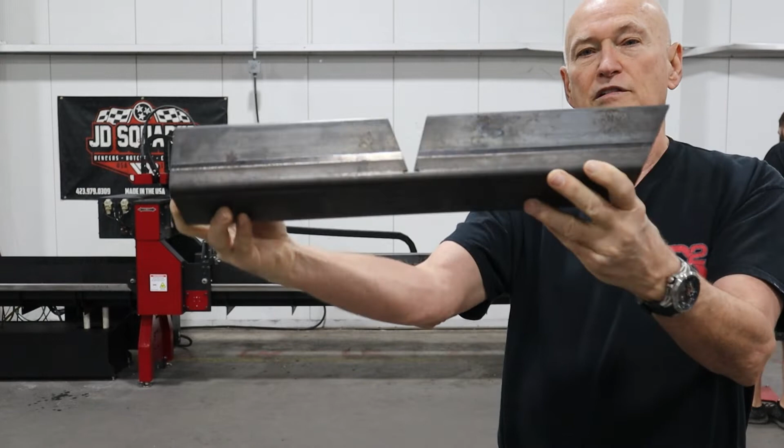Thanks for tuning in. As you can tell, I'm on a live factory floor. In fact, they're actually making these parts behind me. We use our wedge cut system, let me move over so you can see it good, to make the legs that go onto the XR6, XR12, stuff like that.

But anyway, I want to take this opportunity to answer a couple questions that a previous customer who got their XR6 a few weeks ago had asked. There were two things they wanted to know. The lady that's generating the CAD files for the program just wanted to know, is there an easy way to put a piece of tube in the machine and cut it off at an angle or square or whatever.

So currently there's not the easiest way to do it. We're going to be adding that very shortly, but I will be going back showing you in Camelot how to quickly do that. It's easy, but it's not as easy as it's going to be. We're going to be adding wizards to the XR machines where you basically pop a wizard up and say, I want to cut this square or rectangular tubing, and you tell it the angle. The reason we haven't done it yet is calculating that angle coming across this curve is a little math intensive. So I've got to do that.

Now we've already added the wizard that will actually cut off a round pipe. You just put any pipe in it, tell it the diameter of the pipe, and the machine will auto cut it off so that you don't have to go to Camelot and generate a program. We did that one because I'm coming out with the tilt head attachment for the XRs, the manual tilt head, probably before FabTech. What's the day? Like October 7th or something like that, 2022 by the way. So we'll be bringing that out.

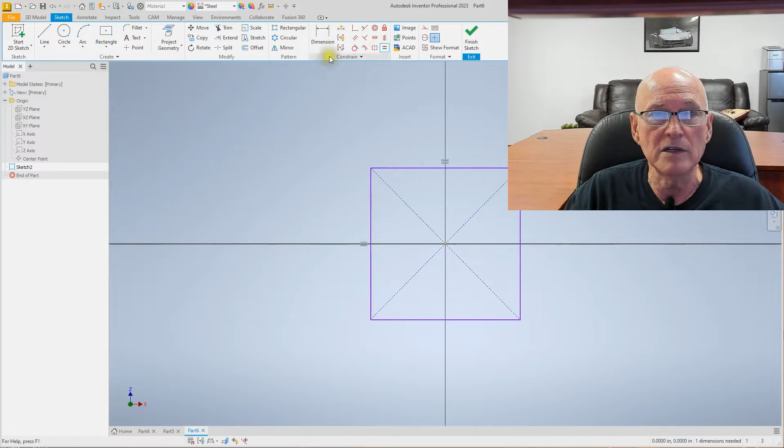All right, let's go ahead. I'm not going to teach you how to run a CAD program. I'm just going to show you how to create that square tube. All right, so we're going to create a square. Let's make the sides even. We're going to go ahead and dimension it at 4 inches because we are doing a 4x4. Now I need to go ahead and fillet the sides. They're 1/4 inch, so let's change that to 1/4 inch. 1, 2, 3, and 4.

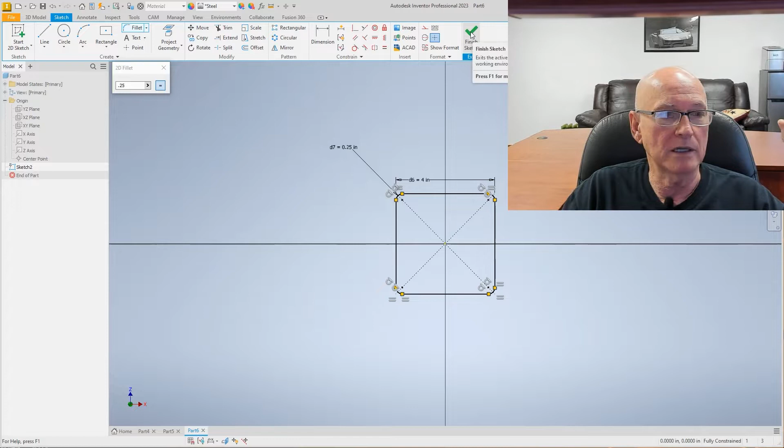That's the outside of our tube right there, and I already screwed up because I just noticed I didn't minimize myself. Well, I'm starting over. So let's go ahead and shrink this ugly dude down. All right, let's continue. Sorry about that.

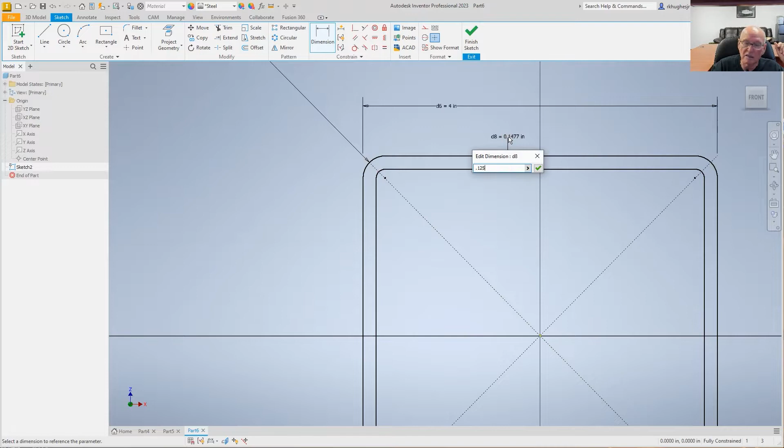All right, now what I've got to do is offset this path right here in a little bit. And we know that we have a wall thickness of 1/8 of an inch. So that is our profile right there. Now we could extrude this profile out and accomplish what we want to do. But before I do that, let me show you the proper way to sweep a profile. Let's say, for instance, it has bends in it.

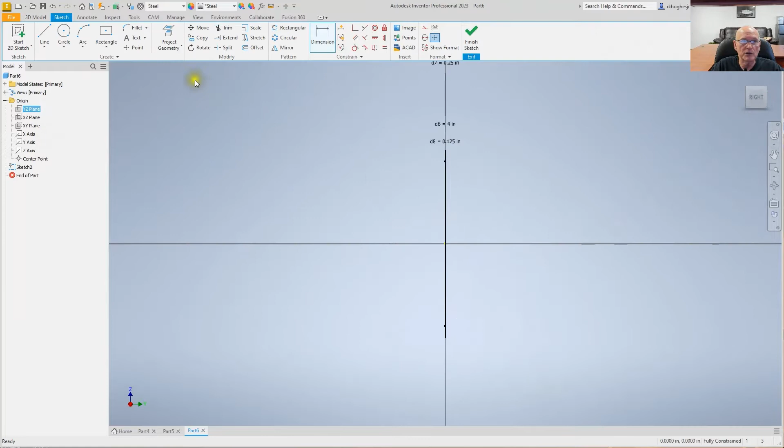So what I'm going to do is I'm going to go ahead and we're going to create a new sketch. Let's draw this line here to here. We're going to go up. We're going to put a bend in it for giggles. And then we're going to go up. Okay, we'll say okay. I'm going to say that these two ends are equal. And anything I'm doing right here, there's no rhyme or reason. I'm just making a part.

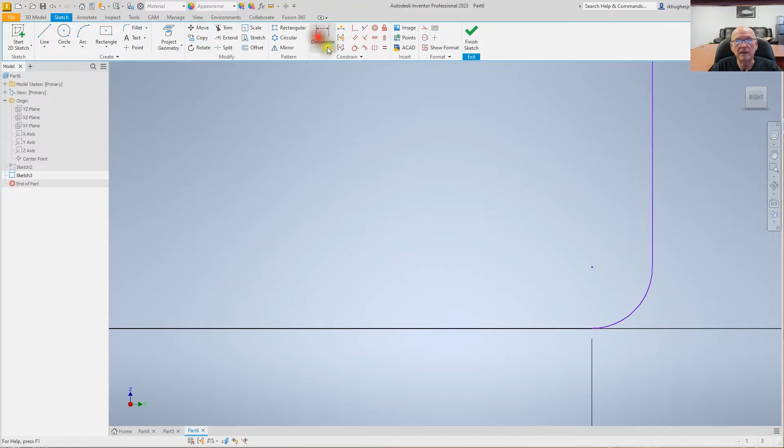Let's go pull this out and let's dimension this. We'll say 6 inches. We just need a number. Okay, there you go. There's how you would create the profile and the sweep. So if I go up here to sweep, it's asking me for the profile. I'm going to click that. Now it wants to know the path. I'll click that one. Okay, that's your part.

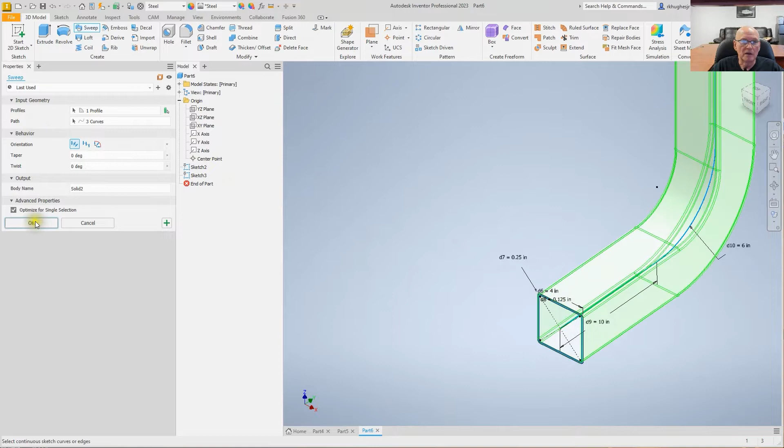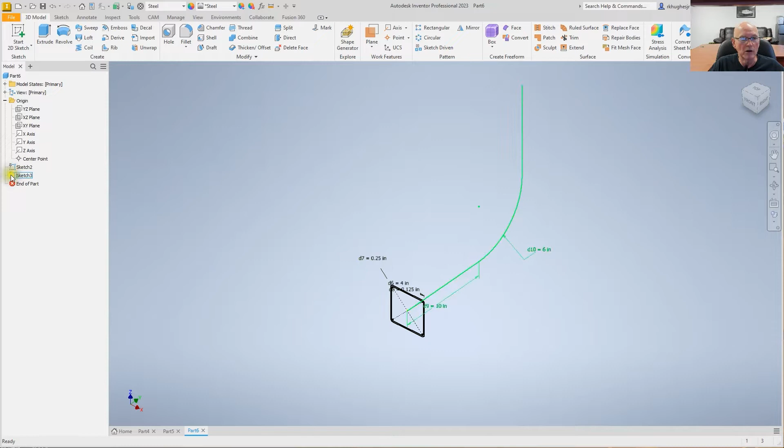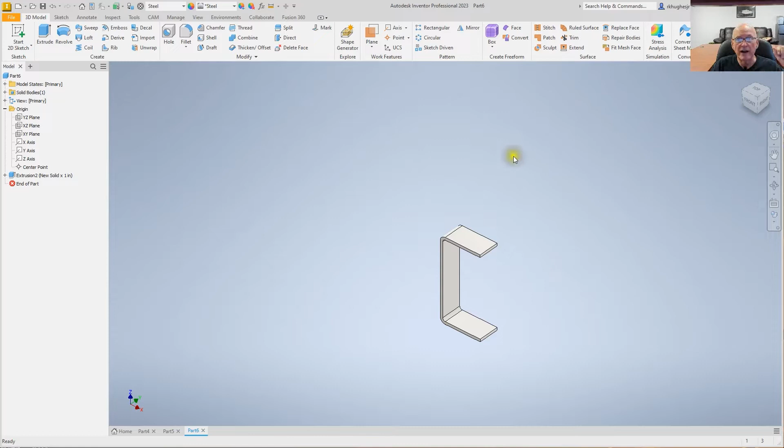Now, I'm going to go ahead and modify this sketch and show you what could happen. We're going to draw a line from here to here. We're going to say finish. Now, let's go ahead and extrude this out. Let me flip it up here. And we're going to extrude it out right there. And we'll say, okay. Now, you can come along and mirror this and create a square look. In fact, I'll show you how to do it. So if I was to say features this, and then as far as a mirror plane, I'm going to select this right here. That's going to be your square tube.

You think everything's okay. Well, depends on how the step file's put out. What happens if the step file doesn't know that when you mirrored it, you wanted a single solid, but instead you forgot to tell it was a single solid, it put out two halves. Camelot will not see that as a square. It's going to see it as two halves. Therefore, it has no idea what to do with it. So that's why you want to create your geometry or your parts the way I just showed you.

Like I said, I'm trying to cover a lot of bases in this video. As my mind's racing right now. What questions have I been asked recently?

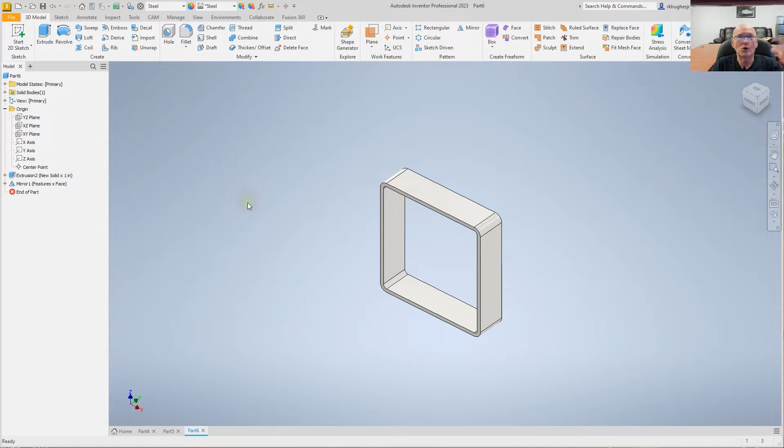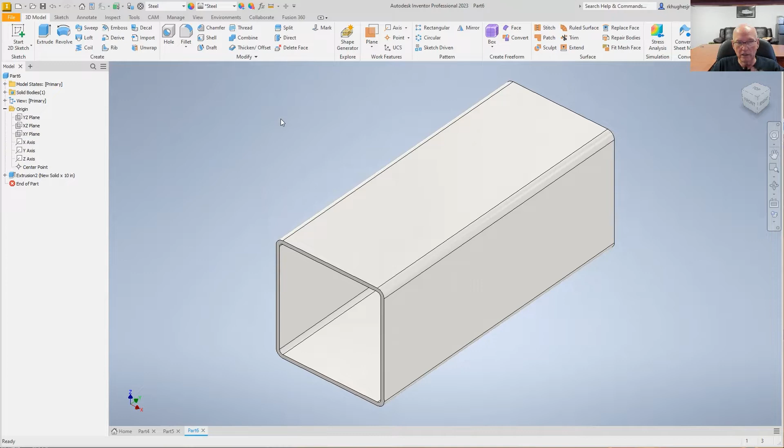So anyway, that's our part right there. We're going to go ahead, modify our extrusion so that we are picking up the solid part, and we're going to make it 10 inches long. You know, doesn't matter the length, by the way. All right, so that's our tube right there. Now what we need to do is we're going to cut this tube off. Now, I think I mentioned it. I'll say it again in case I didn't.

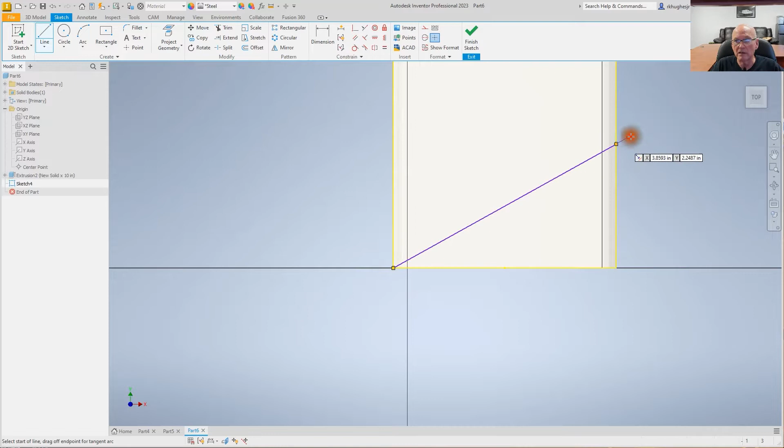This is how Macy, that's the lady who asked about this, could create a part if she had her own CAD/CAM program. She deals with detailing. They make stairs and everything like that, details and all. So she's not going to have their software because their software is probably pretty expensive. But let's just say if she went out and got Fusion 360 for $500 a year or something like that, she can now create all kinds of parts, do things herself, do it this way. I'm going to show you two different ways of doing it.

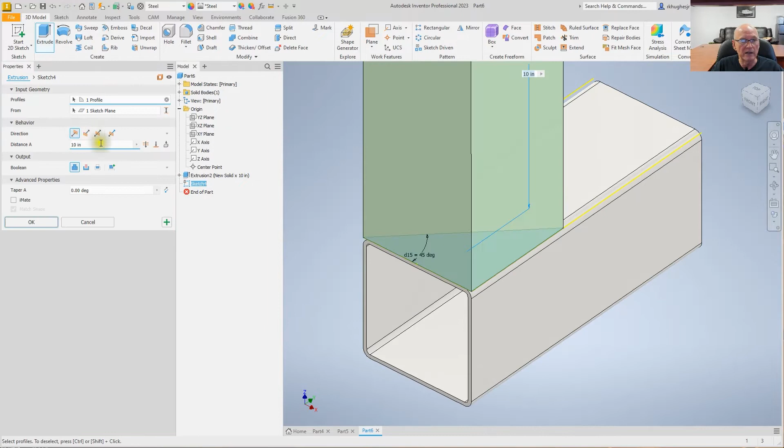So let's go ahead and cut through our tubing. We'll say, okay, there's our part right there. Now, I can take this part and save it as a step file, like right here. Let's go to export as CAD format. Now I need to tell it it's a step file, and then I can go ahead and tell it what that part is. So if I go to my, where did it go? Let's get out of products. Let's go to code, go to Guido, go to test pieces.

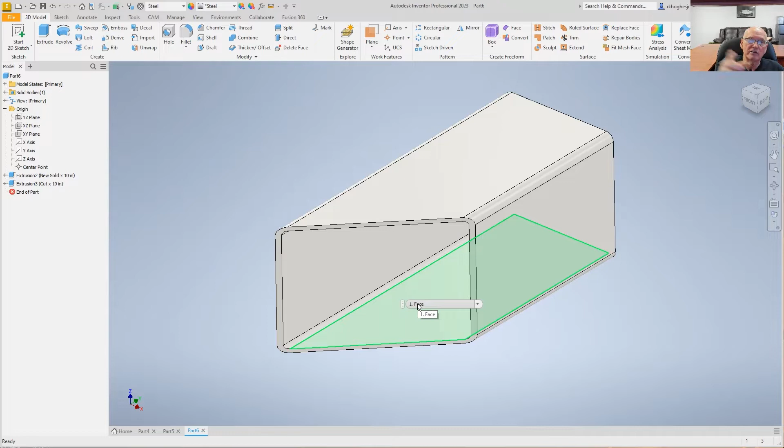I could save that right there as a cut file because it's a step file, bring it into Camelot, process it, go out there and cut. That's one way of doing it. The other way of doing it, of course, is to use Camelot to do it. I'm going to show you both ways. This way right here just happens to be the first one I picked. All right, so that's our part. We could head out there and cut it, and let's just say you wanted a slightly different angle.

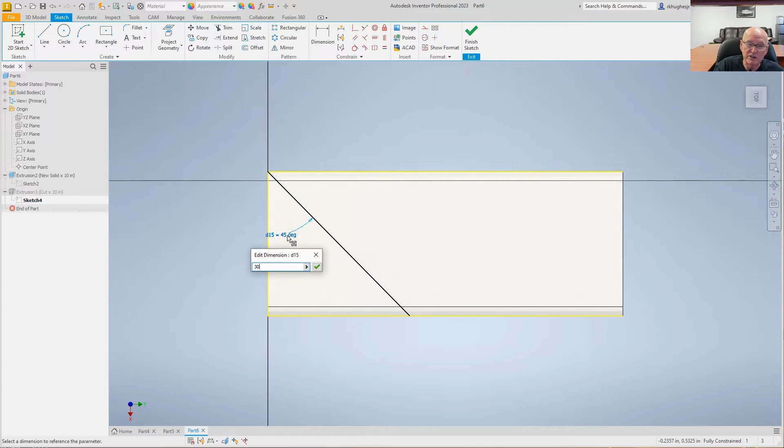You've got this part already. Just go ahead and make it 30 degrees. Bam. Save it as a STEP file. Load it into Camelot, process it, take the G-code, and go out there and cut. That's how you would do it.

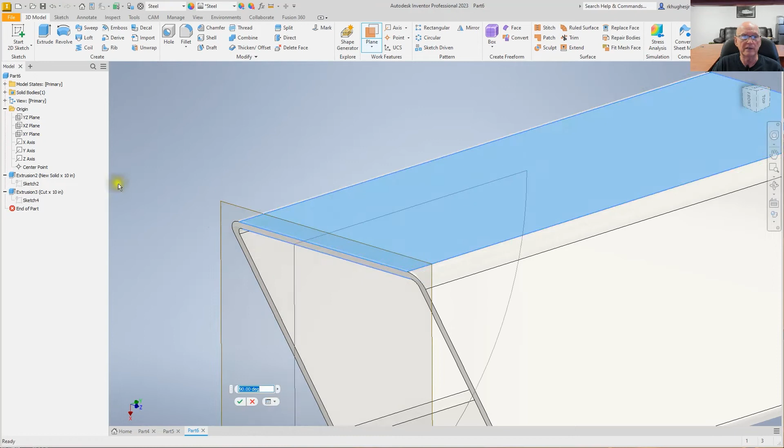Now, let me show you real quick a little bit what normalization is before we continue on with Camelot, and where you could accidentally think your part was too short. So we need to go ahead and create a plane. We're going to pick this face. We're going to pick that. That's our plane. We're going to say OK. Now, I need to go ahead and create a new sketch on this plane.

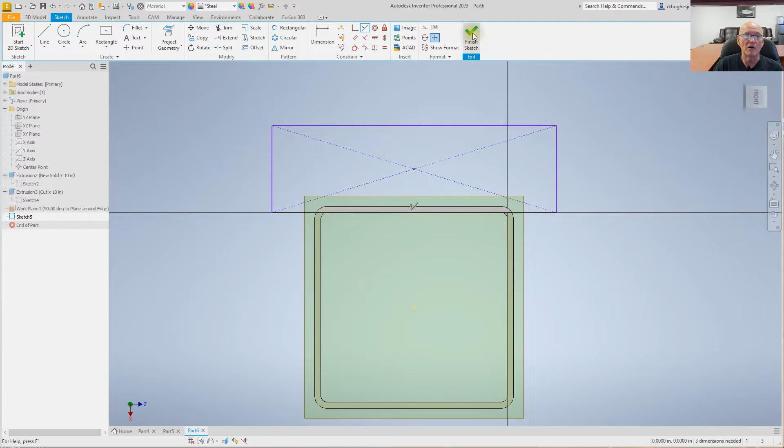Let's zip over here. By the way, all CAD programs work extremely similar. So if you're using SolidWorks, Inventor, Fusion, they're all going to work basically like this. Now, I'm not mentioning all this. I don't have to. You'll see why in a minute. I want to go ahead and cut that face away and hide the work plane real quick.

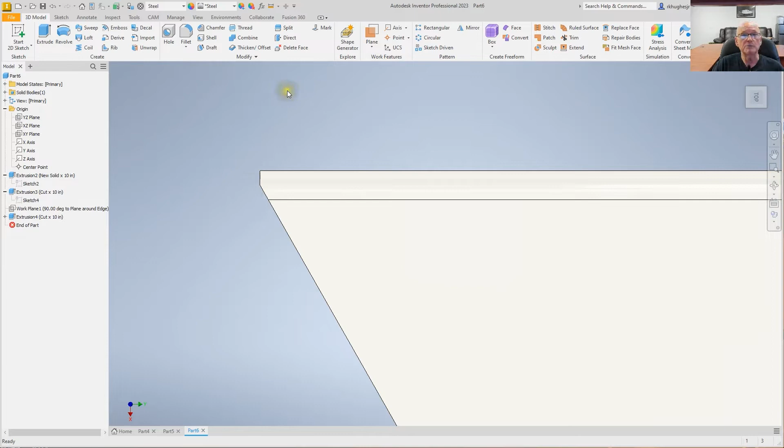That is a normalized surface right there. So let's click it right there. See how it's straight up and down now, and that's because the torch is straight up and down. Now, when we cut this part, what we care about, if I can get this vertical, we care about it mating to a surface here like a flat surface. So we want to prioritize this inside edge.

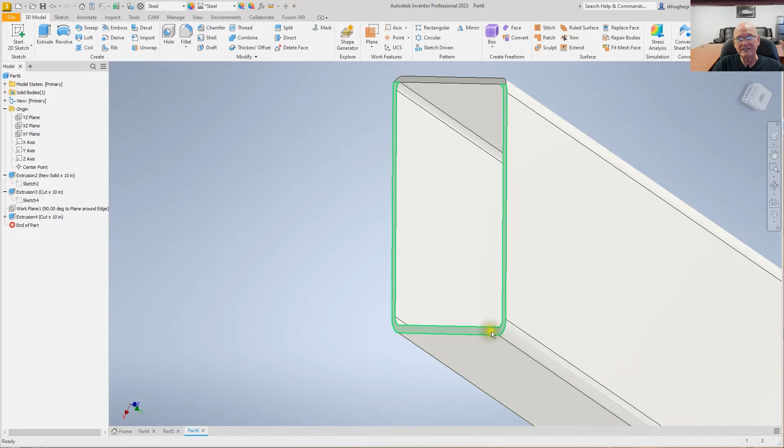Now, when Camelot normalizes everything, it's also going to normalize this side. I'm not going to show you how to do that. It's a little more complicated because you don't only normalize this face, you have to normalize the round around the rest of the bend. And that, by the way, is why I haven't done it yet on a wizard that I'm going to put into the program. Hell, I'll show you the problem.

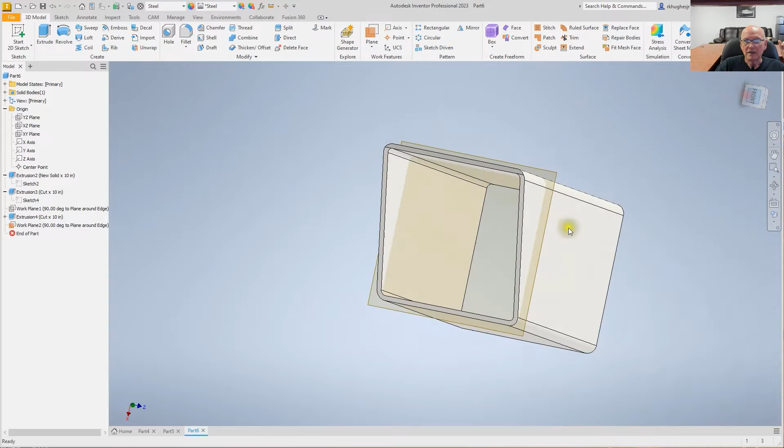Let's create another plane. We'll do that right there. We'll say, okay, we're going to do the exact thing I just did a minute ago. I'm not justifying my laziness, by the way. I'm just kind of showing you that it's going to take a little bit more time for me to do this. Right now, we got a whole bunch of people who want their XR12s, and that's kind of what I've been concentrating on real hard.

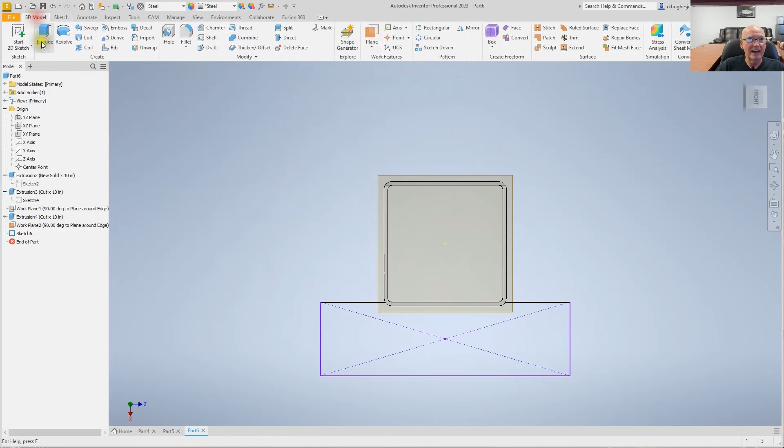So if we do this right here, and we do the exact same thing, we cut it out, we go like that. Okay, let's hide that work plane also. And did I do it? Okay, I did something wrong. What did I do wrong? Oh, I cut the wrong way. Let's flip that the other direction. There we go. All right.

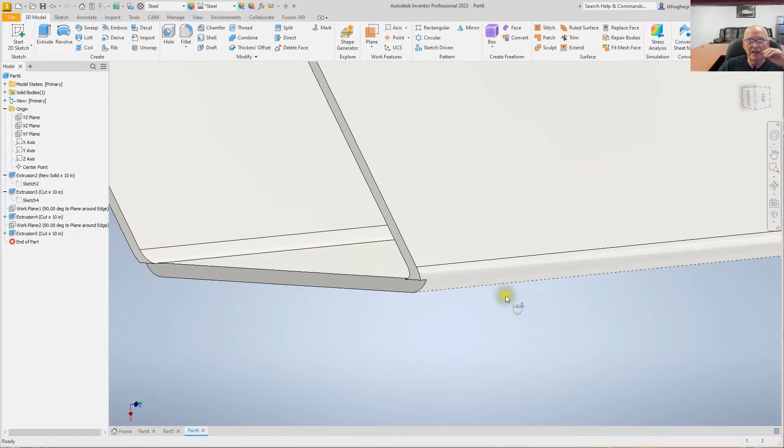There you go. You see the normalized cut right there, because remember the torch has got to come in. Let me see if I can get it to show you better. It's got to come in vertical. Well, when I go to write that code to normalize this, I've got to figure out all the math to normalize this section right here. And I haven't started on that yet, but I will be adding this wizard to the machine before the end of the year.

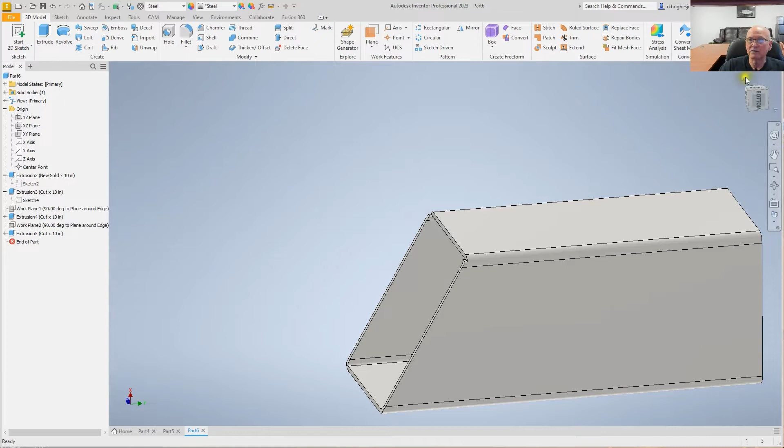I think it's going to take me a few days to write this, and then you won't have to do this anymore. You just go to the machine, you'll fire the wizard up, give it the dimensions, tell it what angle you want, it'll cut it out. But that's for the future. All right, that's what I was going to show you, the problem measuring.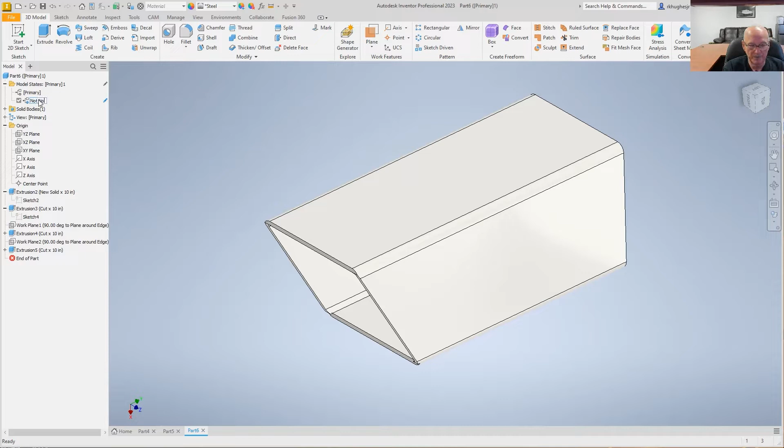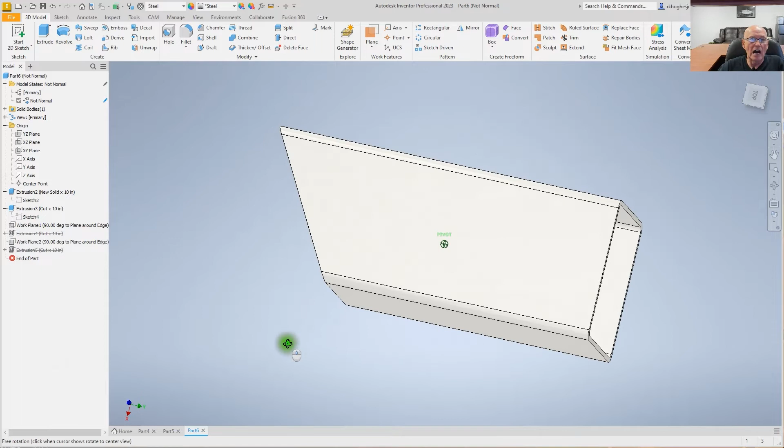Now, I'm going to create another thing right here. And this one right here, we're going to call not normal. How about that? Kind of like me, I guess. All right, not normal. That means we haven't normalized anything, so we're going to go ahead and suppress these parts right here, if it ever lets me suppress it. Come on. Let's suppress that one. And then we're going to suppress this one also. Okay, that's our non-normalized part. And if we click here, that's normalized.

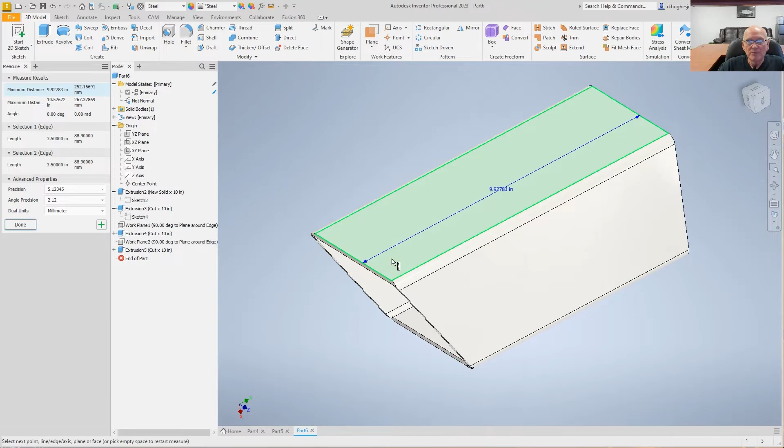So let's go back to the non-normalized part and measure from here to here. We get 10 inches. Now, let's go back to the normalized one, do the exact same thing, measure it. Now we're going to get 9.9278. It's kind of a weird number. Oh, that's right. I changed it to 30 degrees.

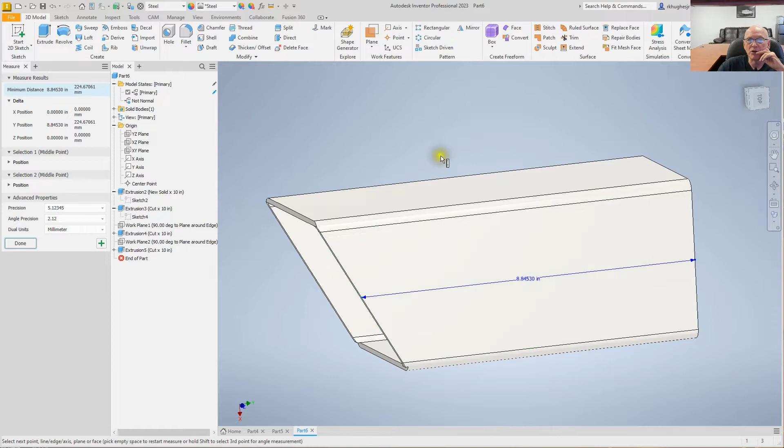If we were 45 degrees, it would have been an 1/8 inch, just the way it is. But it's that, so you can tell that it's not 10 inches long. It's going to be wrong. However, regardless of which way, normalized or whatever, if I had checked from the middle of the tubing to this edge right down, it's always going to be that length no matter what I do. So keep that in mind, that if you measure your part and it's a little short, it's most likely because you're measuring on a normalized surface and it will be short.

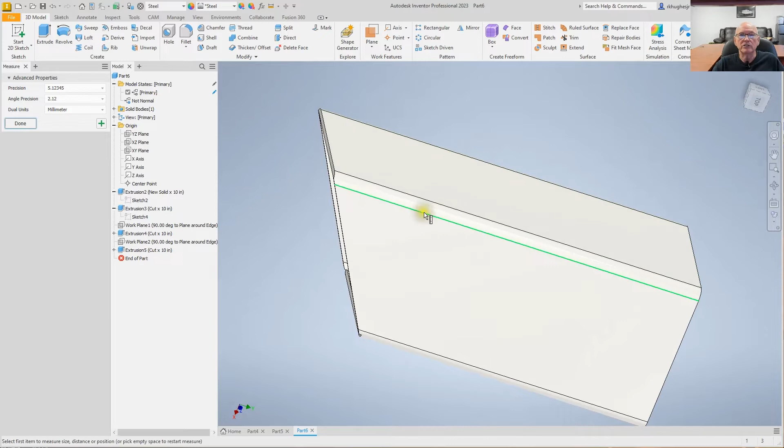Now later next year when the tilt heads come out, they're gonna be able to rotate that torch at an angle to cut that, and you'll actually have the right lengths, but that's coming out next year. All right, anyway, let's go ahead and export this as a step file, and that brings up another thing. I do not export my parts as a normalized part. I don't go to this trouble because Cam-A-Lot is going to do it for you. It's going to do it really, really well, so why do it right here? But I do need to export this part.

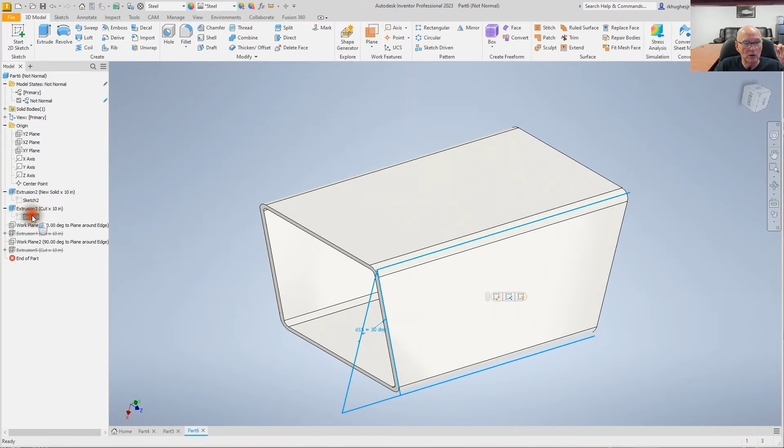First thing I want to do is I'm going to go back and, whoops, I'm sorry. I hit the wrong one. Sometimes I get going too fast. I'm going to go back to my 45-degree cut. Go like this right here, and I'm going to go to export CAD format as, that's right, a step file. Let's bounce up to our code deal. Step files are the 3D format that everybody exchanges, them and IGES files. Now we are going to be supporting a new file. I'll tell you about it right now.

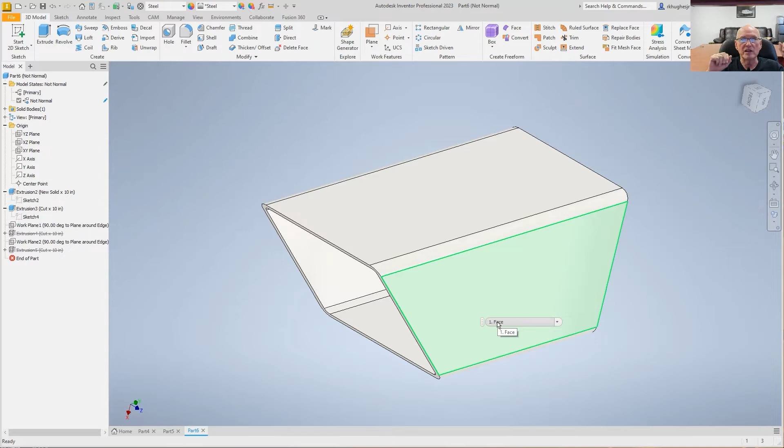Anyway, so I exported that as a step file. Now all we got to do is bring that part into Cam-A-Lot, head out to the machine and cut. So let me show you how to do that. I've got Cam-A-Lot loaded up right here. What you see is a part that I'm currently working on today. And what it is, we've decided on the XR12s to widen the legs out 5 inches. So I have to create new legs. Now, we went out and we cut it, but the angle was not correct. It won't go all the way down. So I have to tweak the parameters, and then we do a test cut and we make the final part.

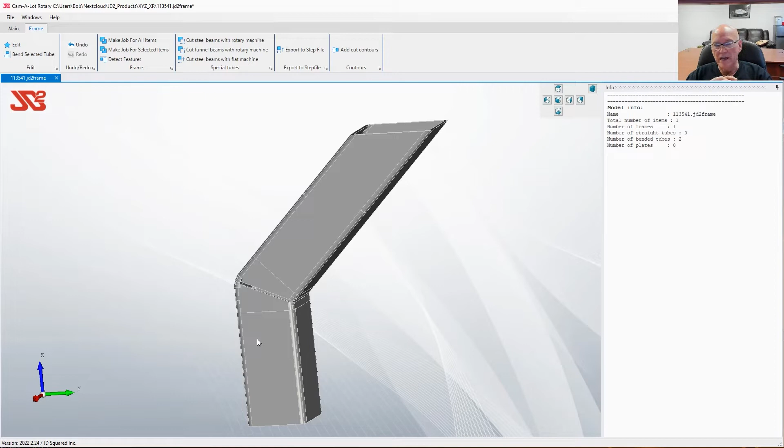And it occurred to me, heck, I'll show you guys how to do that, providing I have time today, because I'm leaving town tomorrow for a week. Wife wants to go to Disney World, therefore we're going to Disney World. And I thought, maybe I have enough time to where I could show you this. We'll see how it works out. If not, when I get back, I'll show you how to do it.

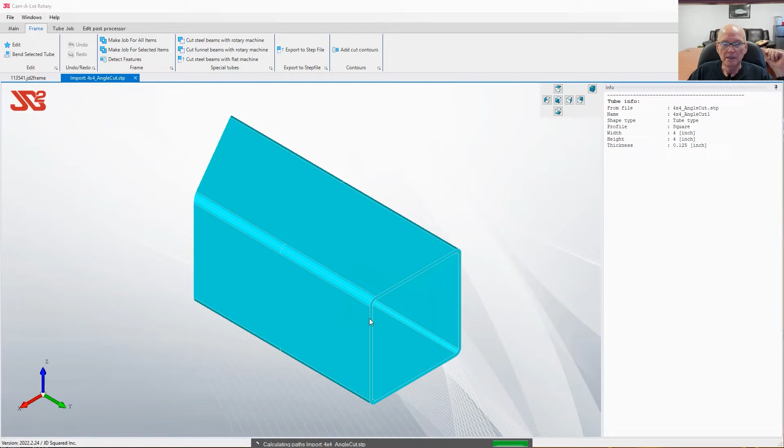Anyway, let's go ahead and continue what we're actually supposed to be doing. Let's bring in our step file. And that's it. Now it's asking me, do I want to detect features? Yeah. And do I want to make a job? Sure, I'll do that too. Let's give it a second. There we go. All right. I'm going to save it as that 4x4 angle cut. We'll say okay. There we go.

Now, if I click on this icon up here that puts it in view, and I click on the start cut, we've got the square side as a start cut. We don't want that. Now, the start cut is the one that's going to be farthest away from the chuck. The end cut is the last cut you're going to make on the end, and it's closest to the chuck. Well, the tube is flipped the wrong way. So what I need to do is go up here and reverse the tube.

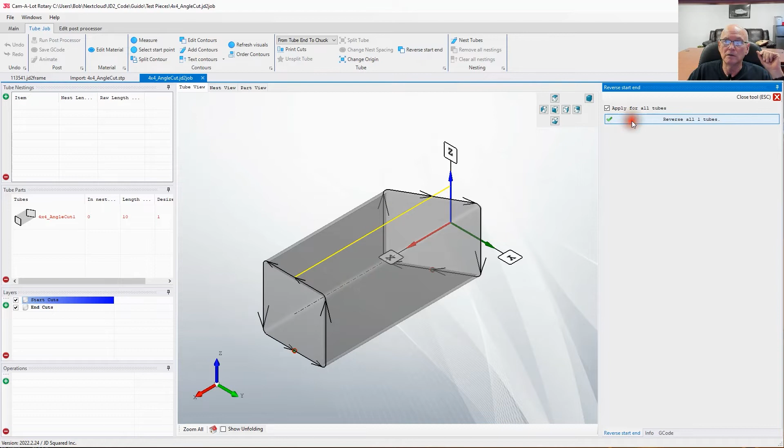And now it's reversed. Now if I click on start layer, I'm there. Because we are not going to create code for the end. We only want to cut off the front right here. So to do that, I'm going to go ahead and get an operation, start cuts, make sure I've got the right consumable for what I'm cutting selected, set OK.

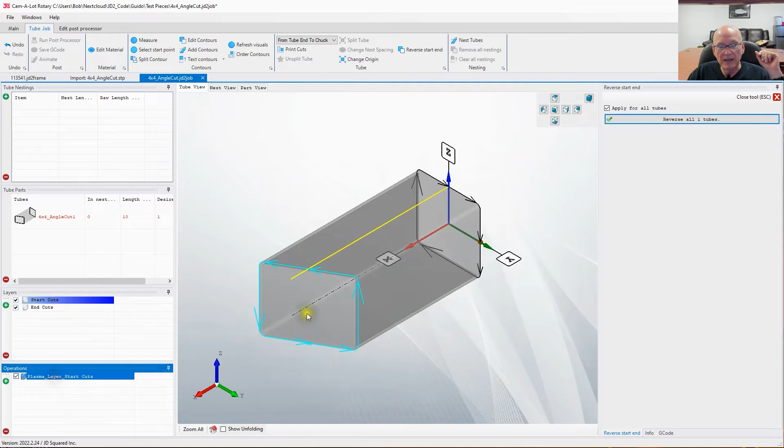Now if I click on it, let's come back over here. Come on. All right, if I click back on it and we rotate, zoom in, you could see the path has been offset. We're good to go, right? Everything is correct. So what I got to do now is close this tool out. I'm going to go ahead and nest it.

Now nesting, generally you're going to select a length for your tube or tell it what you want. In this particular case, it makes no difference because we're only cutting the end of the tube. So I could put 20 inches, I could put 30 inches or 100 inches. It doesn't matter. The program will still run.

Even if I told it it's 100 inches here and I loaded up a 20-inch piece at the machine, since this program is based off the end of the tubing, that's all it really knows. Cam-A-Lot doesn't know how long the tube is. It just, hey, tell me where to start and I'll do my thing. So I'm going to pick 30 inches and there it is right there.

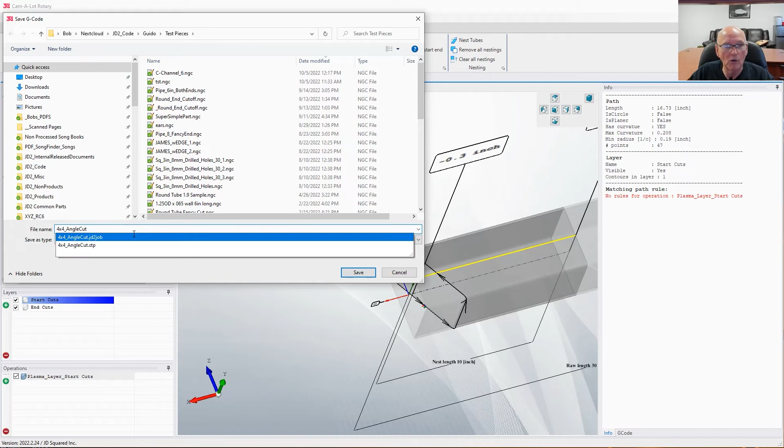Now, if I hit run post-processor, let's call that a 4x4. Ooh, I bet I could do angle cut. Let's get rid of the job extension. We definitely don't want that. And then we say save it. Now we could put this code on our USB, go out to the machine, load it up, and then run it. Now, one other thing I'm going to mention here real quick.

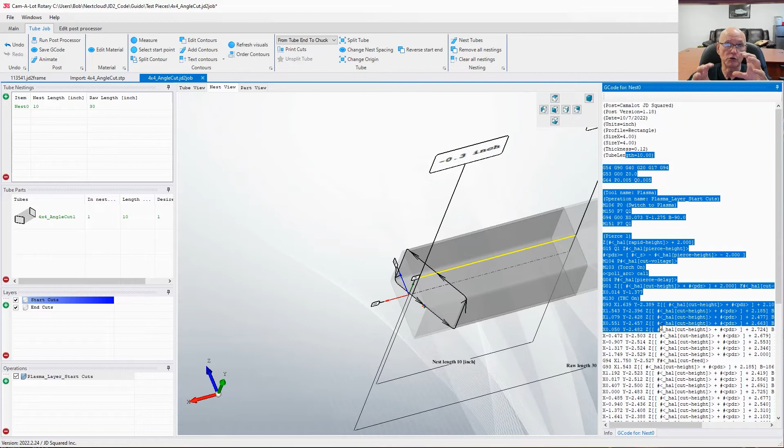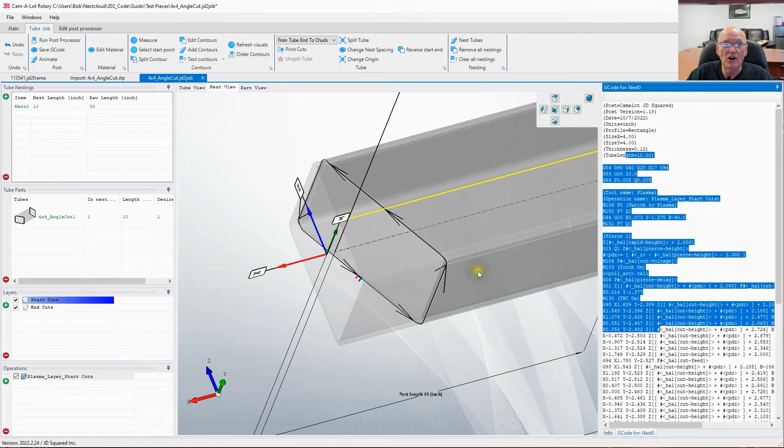All you got to do is look at the lead-in. If you look at where it's going to start cutting and you know it's cutting it on the long side, now it'll show you a visual representation at the machine. That's how you would do that. I just thought I'd mention that real quick. I'm really trying to cover a lot of bases if I can here today. Anyway, Macy, that's how you would do it if you wanted to use a CAD program.

Now, let me show you how I would do it in Cam-A-Lot. I'm going to create a frame. We've got to give it a second. There you go. Now, when it comes up, we have to select the active profile. Now, I've already selected 4x4 with an 1/8 inch wall. Let me show you where that's at.

If I select active profile and I sort by height and I come down here, there's the 4x4 1/8 inch wall, and if you look over here, it's got a 1/4 inch radius. So Cam-A-Lot knows what that is. Now, other videos will show you how to use the profile library, how to add structures to it, different pieces, stuff like that. So we're going to go ahead and make that active, and it's showing that it's active over here.

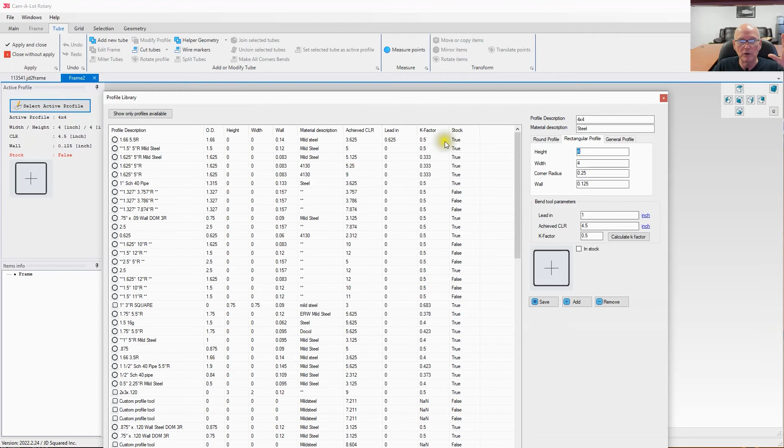In case you see the word false right here, all that means is that for that particular setting right here, let me pull it back up. If we go back to it, I'm just trying to teach as much as I can. The 4x4, it says it's got an achieved centerline radius of 4.5 inches, which means we had to have a bending die that's 4.5 inches. We don't have that die. So we did not click in stock, which means we would have that die. That's why Cam-A-Lot right here is basically warning you that if it's got a bend in it, you're not going to be able to make this part if you want to bend that tube.

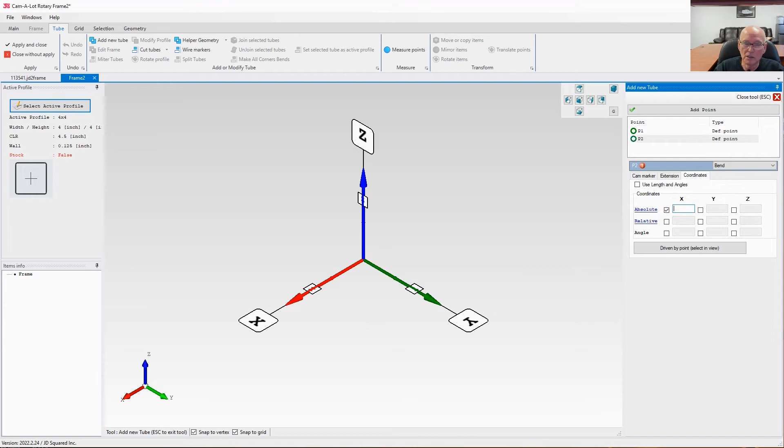So that's what that means. All right, let's go ahead and we're going to add ourselves a tube right here. We're going to add a point. We're going to go this here, and we're going to go 10 inches. All righty. There's our tubing in Cam-A-Lot. So that was pretty easy, right?

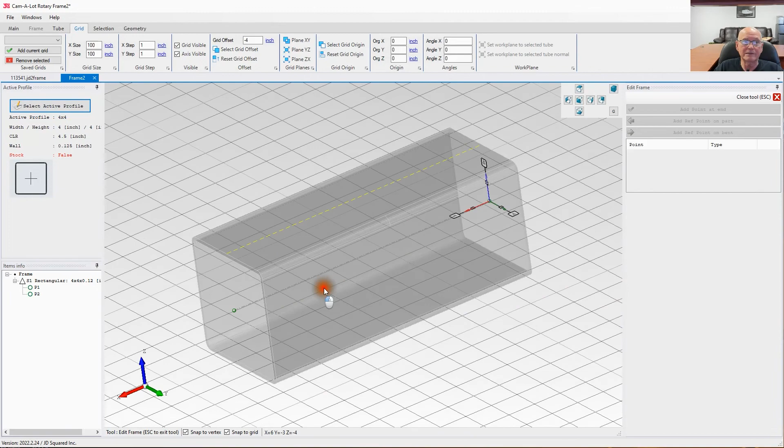Now, if we want to go ahead and cut the end off, we're going to have to use grid functionality. So we go to the grid, we turn on our grid, and if you look at it right here, the grid's on the ground, right? It's flat. Let me see if I could get you a better view of it. And let's zoom out a little bit. I'm trying to see if I could show you that grid. So you can see where it's not lined up. We need it lined up with the face of the tube.

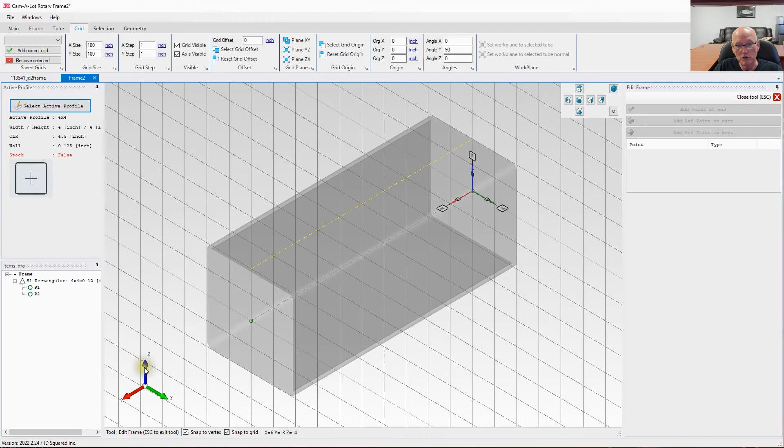So what I'm going to do is I'm going to pick that one right there, plane YZ. Now the way you can figure out which plane to pick is look at the icon here in the lower left. It's got 3 arrows. Those are your 3 directions in 3-dimensional space. Z is up. X is towards us this way, and Y is to the right. So I just picked the YZ plane corresponding to the blue and the green, and that's right here, and that gave us this here.

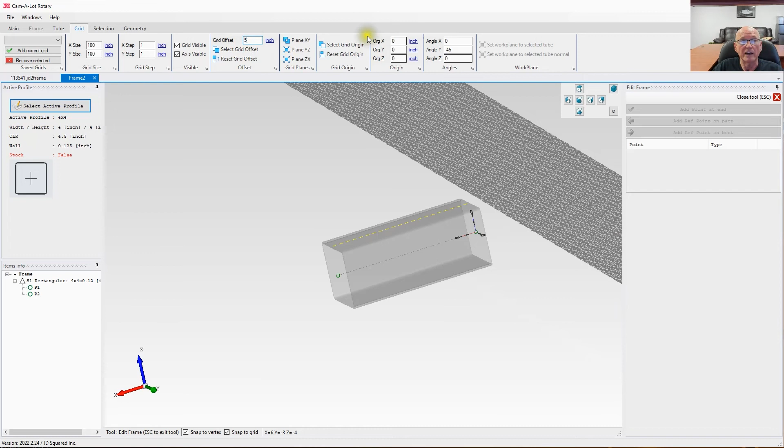Now, one thing we need to do, though, is we're going to cut this at 45 degrees. So let's go ahead. I'm going to put in minus 45 degrees. Take a look at this first, see what it looks like. See, yep, that's the direction I want to go. I'm kind of trying to mimic what we did earlier. However, I have to offset this a little bit. Let's see if we're going the right direction here. Nope. I got to go minus 5 inches instead of 5 inches. Okay, there we go. So what I did is I basically moved the plane to where you could see it cutting through at a 45-degree angle right here through our tube.

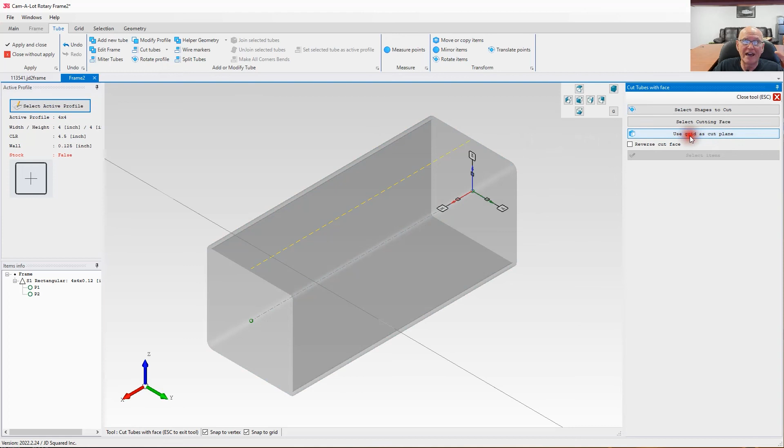So let's go ahead now and actually cut the tube. I'm going to go back to tube, select cut tubes, not regular cut tubes, because when you cut tubes, it thinks you're going tube to tube. We want to cut tubes with a face. And I'm going to go ahead and select use grid as the cutting face, and it'll show you an arrow of which direction it's going to cut. Just go ahead, select shapes to cut, this one here, and then go. There's your shape right there. Now I can go ahead, close that tool, apply and close.

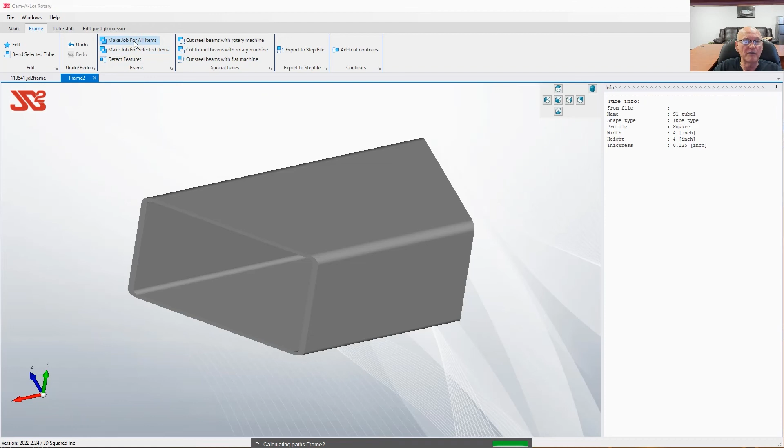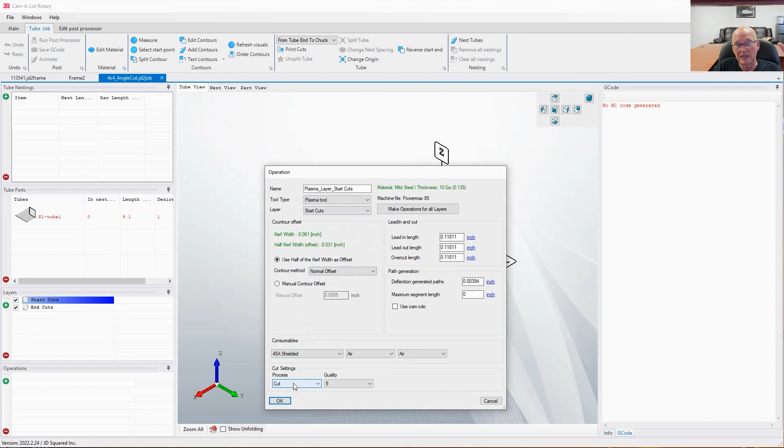This is our finished part, and I do the exact same thing now as when I imported the step file before. We're going to go ahead and save it. Got to have a job name. Save it as that, and then I'm going to add an operation, but I only want to pick the start layer. Remember, this is the start, and we don't have to reverse this one. So I click an operation. I make sure I click start, click start cuts instead of end cuts, and then I have the correct consumable selected, my 45 amp. I say okay, and now I can nest a tube.

Once again, doesn't matter on the length. I'll make it 15 inches. It doesn't matter. And there you go. There's our cut. Let's go ahead, run the post processor, get our G code. Remember, the G code's the file that we're going to take to the XR. And there you go. There's a G code. Take that, head out to the machine, cut it, and you're done.

Now, you would have to go back and modify the grid settings every time you do this, or recreate the grid and offset it. I think if I was doing this a lot, I would probably use my Inventor because it's easy to go in, change a parameter, export as a step file, and away I go. That's probably the way to go. But if you didn't want to have a separate CAD program, Cam-A-Lot does do this. Now, I'm looking forward to when I can write the code to do this at the machine. Then you could disregard everything I just showed you once I do that.